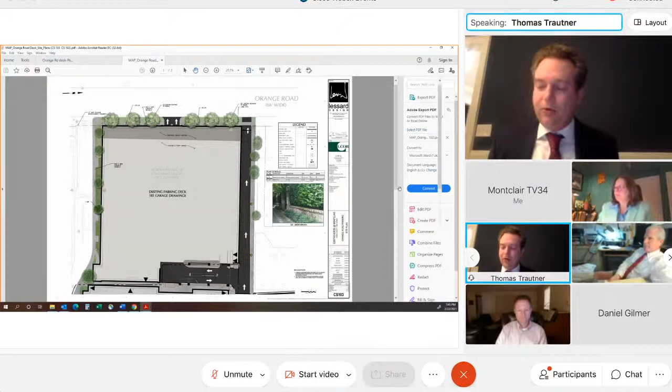Thank you, Janice. So with that being said, thank you Mr. Chairman and members of the board. Again, we're here for minor site plan approval to discuss the removal of a certain lift and slide automated parking system that was internal to this structure, the Orange Road deck, and to extend in place of that lift and slide automated parking system the floor plates, so to attempt to make up for some lost parking. When we were last here, the board had asked for a few items, and Janice, I just realized there's another one from what we just referred to. You had asked for an elevation of the facade that was previously approved, which we submitted, and perhaps Janice could allow for that to be shown. It just popped up on the screen.

Additionally, the board had asked for a parking management plan or parking plan to be submitted by our valet consultant, which we've also submitted. And finally, the board had asked if it would be possible to obtain a site plan which would clarify a certain encroachment of 8 inches into the right-of-way along the Orange Road frontage that was the subject of an approval that this board granted in 2017.

We thought that we would need to create that from scratch, but then in looking through our files, we discovered that there was an exhibit that was submitted. It's referenced in the 2017 resolution of approval as Exhibit A9 at that time. It's a colorized site plan which depicts the encroachments I just spoke about, kind of shows what I'll characterize as somewhat de minimis. There's 8 inches at one column, 7 inches at another column, and otherwise a few inches on a partial run of the south side of the facade along Orange Road. We'll speak about that exhibit in testimony this evening.

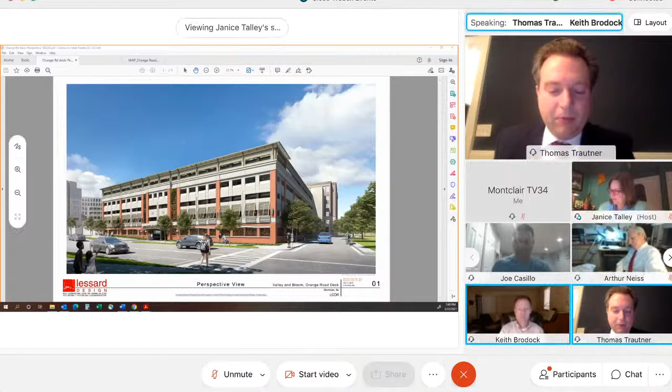Mr. Casillo, how long have you been employed by MAP, or I guess its affiliate LCOR? About 15 years. And your title is project executive. How long have you held that title? Going on 2 years now.

Now, what are the duties and responsibilities you have associated with your title at MAP? One of my duties is overall project coordination from inception to budgeting to implementation, construction, and completion, with obviously the owner's best interest at heart. Coordinating the project with all the design professionals, construction managers, local jurisdictions, reviewing of general contractor budgets and cost estimates and things of that nature.

And you're familiar with the subject of the application that MAP is presenting this evening? Yes. And you're familiar with the Orange Road deck and this project in general? Yes. And you oversee this project in accordance with your duties and responsibilities at MAP? Yes. And I believe you may have actually testified in 2017, at least in a limited capacity, regarding this project. Yes, I did.

So now, Mr. Casillo, you heard the testimony previously where I believe members of the board have been contemplating whether or not the 8-inch encroachment into the right-of-way that was granted by this board in 2017 should continue in light of the fact that the lift and slide is being removed. The question I'll ask is: if we don't move the facade back 8 inches, if that facade stays where it is, what is the approximate cost that MAP is incurring to basically build the facade that was approved in 2017?

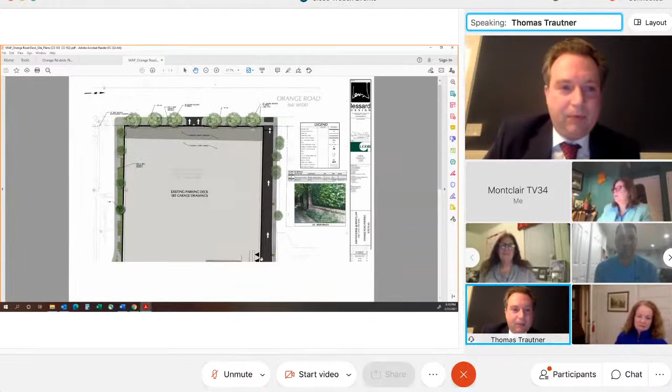There are two columns where there's about a 7 and 8 inch encroachment, and then there's a stretch on the south part of the building where the facade starts at 4 inches and goes down to, I think, 0 inches as you get near the columns in question. The short answer is, Joe, you can tell me if I'm correct, I think it would be rather elaborate to pull the whole building back, but the blunt answer is I don't think it would have any impact at all in terms of the parking that exists in the building. You don't gain any, and you don't lose any. The encroachments are related to the facade on the exterior.

Correct. Okay. And if this was to go ahead, maybe Janice Talley knows the answer. What would be the timing of the work, this very disruptive work, as Mr. Casillo mentioned, on Orange Road? What would be the timing with the building of the adjacent building where Ferrara's auto body was? A new building is going there. So what would be the timing of the work for each building?

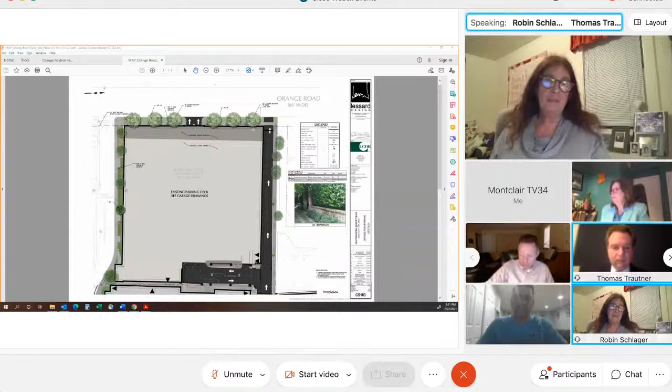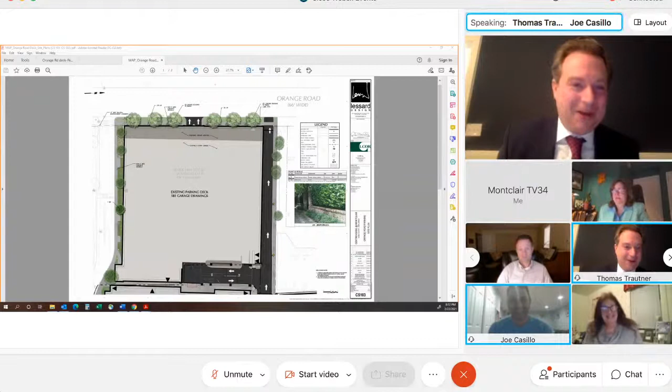Robin, I can't answer that because that's dependent on when the developer is ready to get started with the adjacent project. Joe, can you speak to, imagine that we were approved this evening, what would you anticipate would be a reasonable time frame? Bearing in mind a small period of time for resolution compliance and to continue and complete the work to build the building, the facade as was approved in 2017.

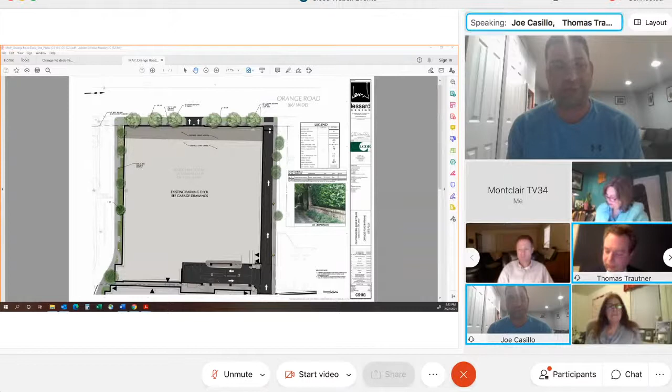So just so I'm clear, to continue the facade work as it stands today, is that what you're asking? Yes, correct, because some of it's already framed. I think the duration to complete it would probably be in the neighborhood of 2 to 3 months, only because some of the elements are weather dependent, primarily the stucco finish. You really can't do stucco in these temperatures, so you'd probably need to be somewhere in the middle of April before doing stucco. I would estimate we're in March already, so March, April, probably close to about 3 months.

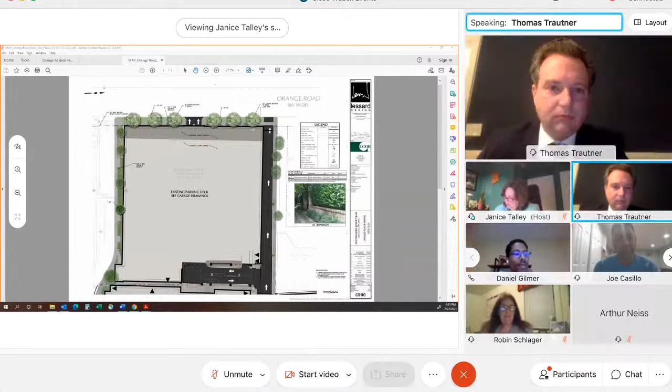Mr. Gilmer? Yes. Mr. Gilmer here, thank you for the testimony tonight. Also reviewing what we discussed last time, at the last meeting Mr. Berry noted that the lift and slide is not feasible, and I appreciate you mentioning the claims that are in that litigation, because that was actually a question I was going to raise as well.

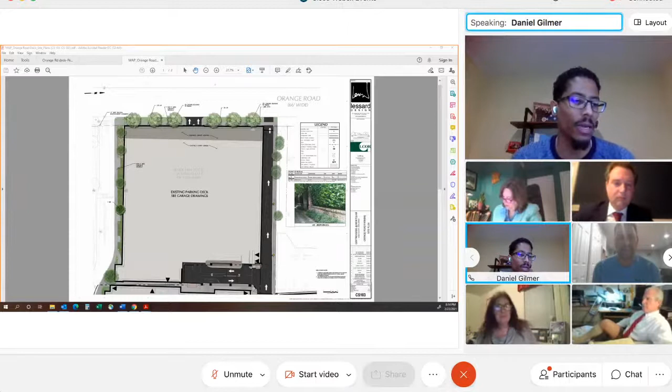And I know we discussed this a bit last time, so can you help me understand how this is not, it seems like a mistake that may have occurred? Mr. Trautner, what's the best way for us to understand as a board? Because even the questions asked tonight are kind of understanding the challenges with the lift and slide, but we can't get into some of the details of litigation, and there's concerns around costs raised tonight, which, similar to what Chair Nguyen mentioned at the last meeting, seems as though considerations of cost to a certain degree are out of scope for what we're considering tonight.

So if you could help me understand what led to the change in plans away from the lift and slide, and then also how cost is kind of in scope for what we're deciding tonight. Because what we already approved many years ago was a concession to a degree, a variance that was granted, and even what was in that resolution is not now being satisfied.

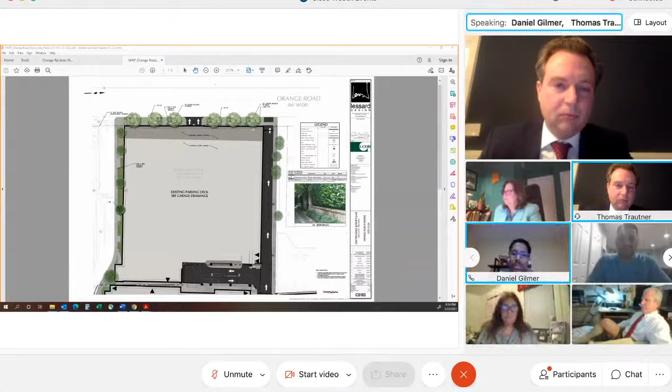So it's just a little difficult, I think, for some of us to now consider an additional variance when the previous resolution was not abided by, in part for reasons that it seems like we are not fully privy to even now.

Sure, I'll do my best to answer some of that. The short answer is we do not believe that if we were to attempt to complete the installation of the lift and slide automated parking system, that it would work.

We have additional concerns about it structurally. That's all the subject of the lawsuit. I apologize if it sounds like we're being cagey because we're not being exhaustively detailed about those allegations in the litigation. Part of the problem is it's the subject of ongoing litigation. There's something like this idea of qualified immunity - within the litigation you can say things, but outside of it, it gets a little more gray before people start getting upset about what you are or aren't saying about a defendant in a lawsuit.

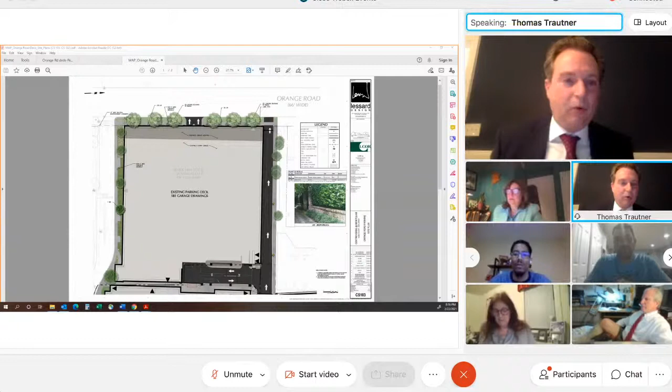So we're somewhat constrained about what we can talk about, except to say it is our belief and concern - and I'm going to make this sound rather extreme - let's say you were to completely deny this application and say MAP, we want you to install the lift and slide mechanism. Our concern is we would install it and it would never work, which is what led us to make the painful decision, and this is part of Mr. Casilla's testimony, that we would need to change direction.

Not install the lift and slide - the lift and slide again being internal in the building behind the facade - and instead extend the floor plates. We believe we could still achieve enough parking to satisfy the intent of the redevelopment plan to have adequate parking for the redevelopment projects. And it's going to cost us more money, specifically at least another $600,000 to do it this way, as opposed to if we could just install the lift and slide and be happy with it, and have everyone happy with it.

We think you won't be happy with us if it doesn't work. So what we're trying to avoid, in terms of bringing up the cost, is that rather than just spending another $600,000 or more to extend the floor plates, we're not also spending another $1 million to try and pull back the building 8 inches.

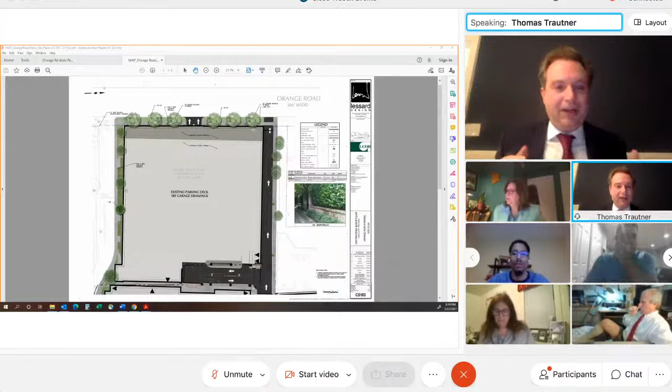What we're saying is we've spent a lot of money to put up a facade that was approved in 2017, and we don't want to have to tear it all down just to pull back a couple inches when doing so doesn't seem to serve any real necessity, planning or otherwise. And again, I'm starting to testify for the planner, and we should really wait till we get to his testimony, but it doesn't really seem to serve any purpose other than just saying, well, it's the principle of the thing. We think the law and the planning considerations should merit this board considering allowing us to continue with the facade as previously approved in 2017, where it is currently located, and that the 8 inches is really a de minimis issue.

Tom, if I might, I think Mr. Gilmer's question might be answered if you were to disclose whether or not you've had an expert review the lift and slide mechanism and opine that it would not be able to work. Or is this just an internal decision made by MAP that it's not going to work and therefore you're going to replace it out? I may be being presumptuous, Daniel, but I think that might go to answering your question.

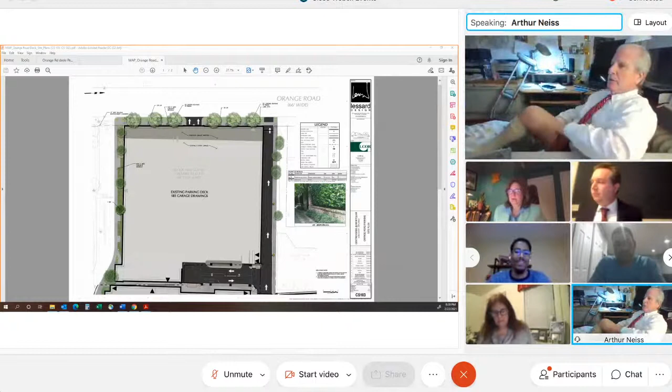Yeah, it would help in part, Mr. Trautner. Yes. I don't know if Mr. Casillo, can you, I mean, I have to imagine it's not like you or Brian Barry personally just one day woke up and thought this thing doesn't work. Can I assume, they may not have put a report out in the litigation yet, but I assume you've had professionals look at this independently and opine on this?

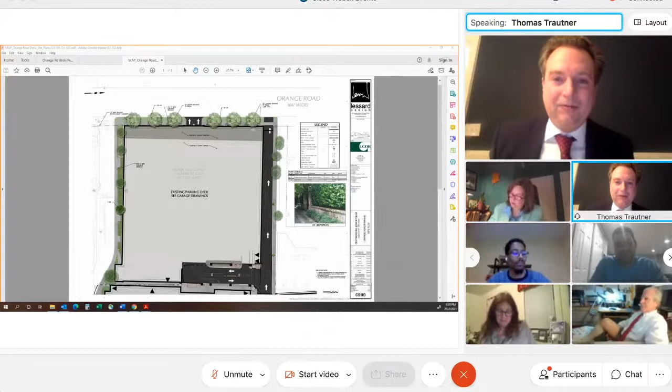I mean, I don't know if Brian, you want me to, again, I'm not sure. Or Mr. Barrett, if you can answer that question. I mean, I could shed some light. I'm not too sure how much I can say. At a high level, trying to take off what Mr. Neiss says, we have had 5 separate professionals in this field come out and take a look at this system, and all 5 have declined for a multitude of reasons to get involved with it.

And when you say get involved, you mean complete the system? Yes, take ownership of the design and complete the installation as it is. Again, for a multitude of reasons.

We also have a 6th expert coming from across the country. He was supposed to be here last week. Unfortunately, the weather delayed him. He is due out this Thursday for another opinion. So again, at a high level, we have taken the extra steps to investigate further. To Tom's point, we didn't just wake up one day and say, 'Oh, we're not using the system, forget about it.' We have taken...

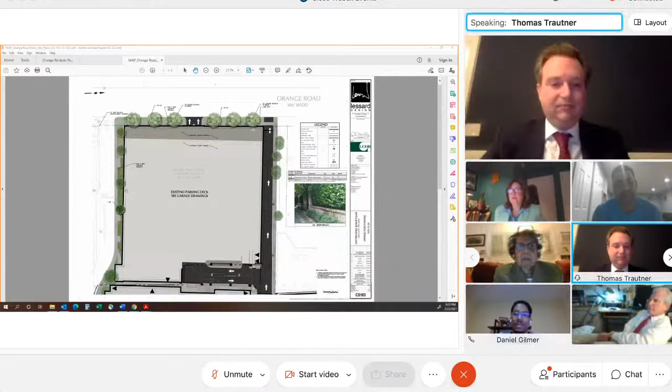And just to make sure we're clear on this point, the concerns that have been raised by these experts were not foreseeable when this application came to the board before? Correct. You're asking me that? Yes, correct. Are these people right, experts?

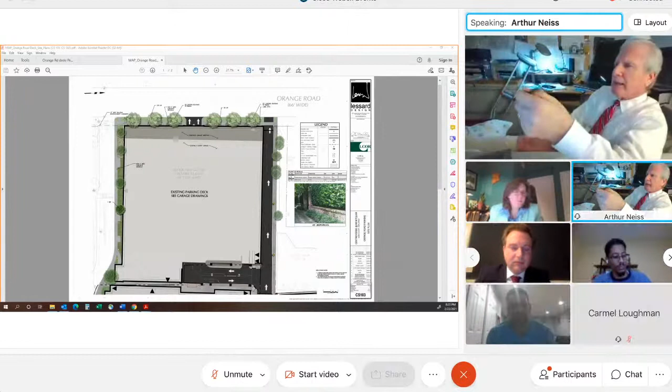Yeah, I'm sorry, Daniel. Are they experts or are they just contractors who are coming in to take up the construction or the creating of the lift and slide and decline to do so because of whatever reason, because of the proprietary nature of the lift and slide or whatever? Are they experts or are they just contractors who refuse to do it?

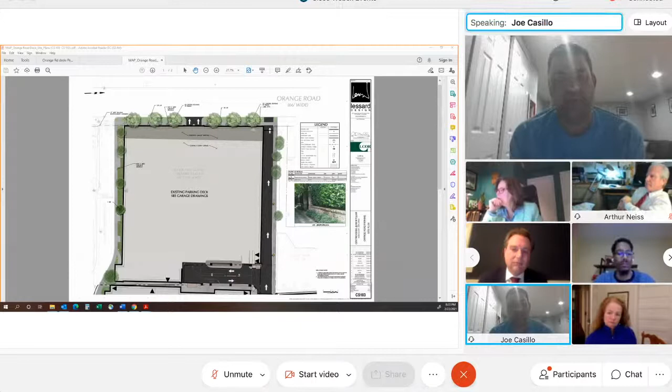No, they are, and Tom, if I may, they are experts in the field of automotive parking systems. All 5 of these outfits design, fabricate, and install their systems. So short answer, they wouldn't just be a miscellaneous steel contractor to come in and finish the work. They have design parameters as well. And engineering.

So basically, they told you, and forgive me, I'm not trying to be a hard nose about it, but basically they told you they wouldn't touch this lift and slide mechanism with a 10-foot pole. Yes, sir.

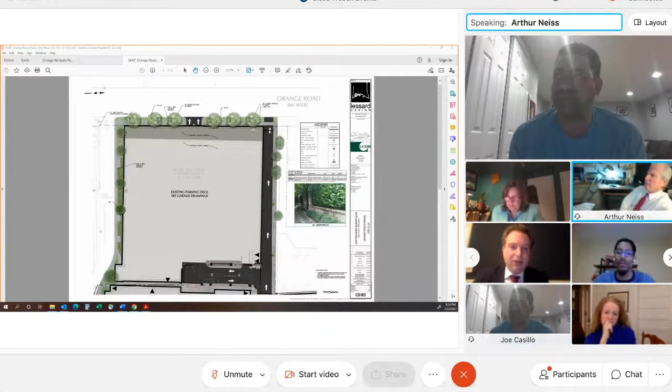Did they tell you why? I'm sorry, did they tell us, did they say why? Did they tell you why they wouldn't do it? Joe, I just don't want to get you in trouble. So yeah, I know, maybe at a high level answer. I mean, if you want to give the answer, because if this is true, if they said because we don't think it'll work, that's probably... I don't want you to struggle and start saying stuff that you shouldn't.

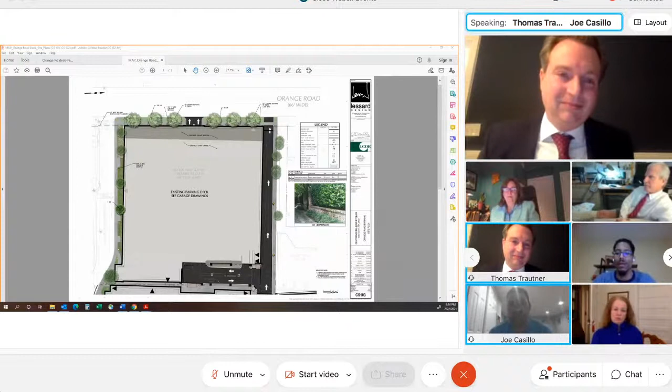Yeah, I mean, I guess for lack of a better term, they don't believe it'll work for, again, a multitude of reasons. They would not get involved. They would not warranty anything. Yeah, for a high level response, they just kind of scratched their heads and looked at us and said that this is not going to work, without getting too far into the detail of why.

Daniel, I apologize for preempting you. No, that's fine, actually helpful.

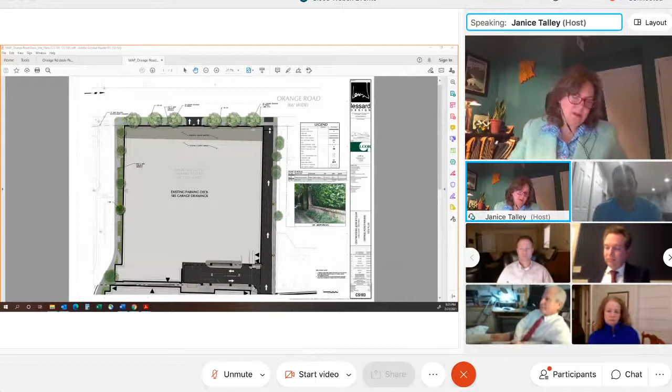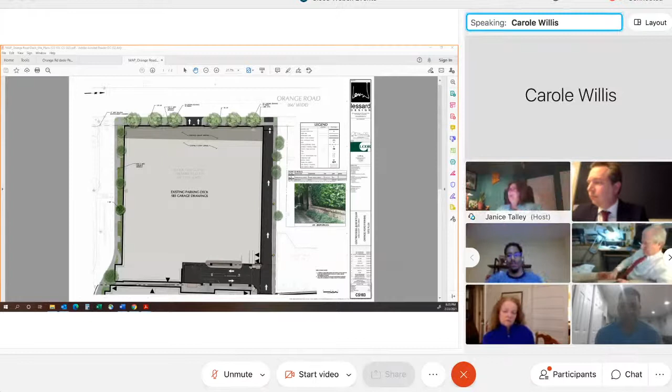Carole, I don't think you have your audio turned on, so if you want to ask any questions, you need to turn on the audio on your computer. I did turn it on. Can you hear me? Oh, now I can hear you. Good.

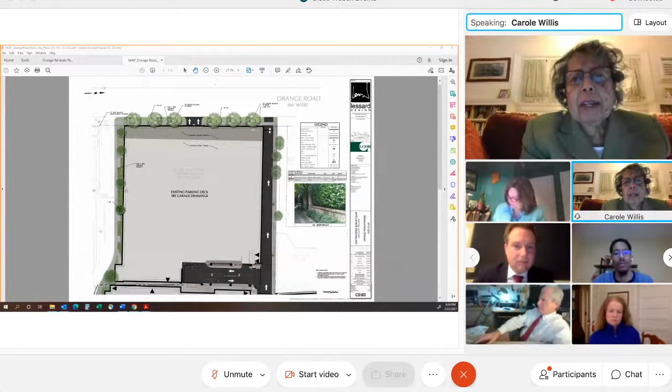I had a question at one point. At the last meeting, when I asked, was this problem with the lift and slide one that was going to cost us parking spaces? I believe I was told the answer was that it would be about 3 per level. So now I hear today that there is no change in that. Was I wondering, did I miss something, or can you clarify what the impact is on the number of parking spaces?

My understanding, and Joe you could probably confirm this, is there's no impact on the parking spaces. Ms. Willis, unfortunately, when we were here at the last meeting, we were operating under a mistaken assumption that more of the front of the building was within the 8-inch encroachment than actually is.

When we found the exhibit, which we've now produced, there's a page on the screen labeled CS103. There are certain insets drawn on this document which reveal the manner in which the encroachment occurs. Inset A shows a 4-inch encroachment into the right-of-way at the southern end of the building along Orange Road. Inset B shows a certain column encroaching 8 inches into the right-of-way. Inset C shows a column encroaching 7 inches into the right-of-way. Inset D reveals that by the time you get to the northern edge of the building, or actually much before that, probably starting at inset C and all the way across to inset D, the building is actually behind the encroachment line. In other words, there's no right-of-way encroachment there.

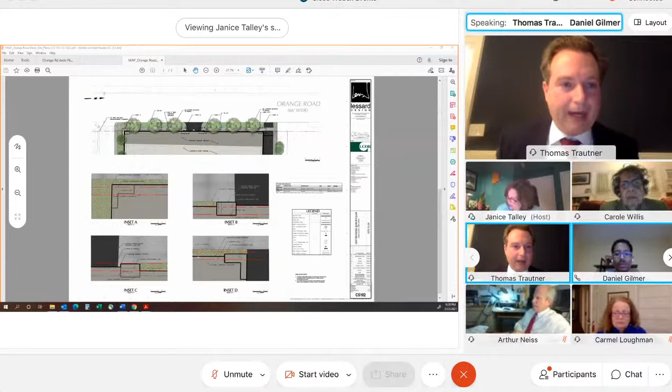The short answer is these encroachments are rather de minimis. Because they're de minimis, if the facade of the building was required to be pulled back, it wouldn't affect parking one way or the other. We wouldn't gain any parking spaces, but we also wouldn't lose any. The encroachments really relate to the facade elements of the building. It's not that enough of the building is sticking out that it would cause a loss in parking, or conversely a gain in parking if you let us keep it.

Thank you, I have another question. Yes, I'm sorry, Daniel. Were you done, Daniel? I was not earlier, but fine to go ahead, and then I can come back to mine.

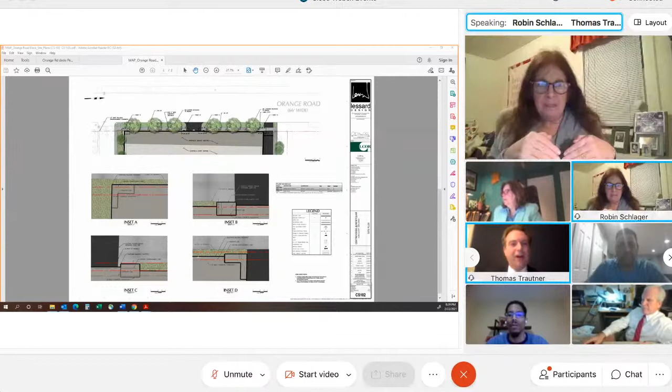So if you could explain to me, LCOR and MAP bought the parking deck from another entity recently? Well, it wasn't recent, but it was actually acquired from the township, and the township previously acquired it from DCH Auto. So the town built the parking deck? I believe DCH Auto built the parking deck. It was originally built to store their auto inventory.

So when LCOR and MAP bought the building, did they not have an inspector go through it and find out that the parking mechanisms, that the lift and slide, wasn't working? It's like when you buy a house, you have an inspector, so you don't buy a house and find out the elevator doesn't work. Sure, no, it wasn't there, ma'am. It wasn't there at the time. When we purchased the property in 2012, I think it was, the lift slide didn't exist.

Councilmember, so just by way of quick background, this deck was owned by DCH, then it was acquired by the township, and then in conjunction with the development of the Montclair Center Gateway Phase 1 redevelopment plan, MAP got involved. MAP obtained site plan approval after being designated redeveloper of the Valley and Bloom redevelopment plan at that time in 2012. That approval also approved the conversion of that DCH parking deck, which was not really a public parking deck, but really just a building designed to house auto inventory, to become a public parking deck to serve the redevelopment area.

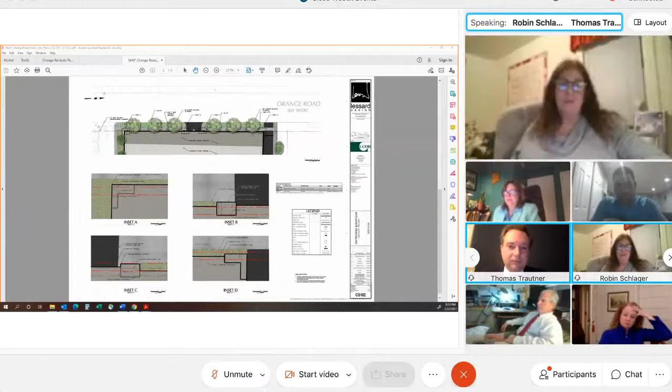Yes. So as Chairman mentioned, the lift and slide was part of this, previous variances even being approved, but holding that in place for the time being, Art or Janice, I had a quick question.

So given that we have the township having granted the encroachment easement back in 2013, but then we also have the additional 8 inches in 2017, were we not to approve this application as it stands tonight, the latest version of it, what occurs with that 8-inch easement or encroachment easement from 2017? I'm just trying to understand how this plays out, where that lands on the other end, were we not to approve what's before us now.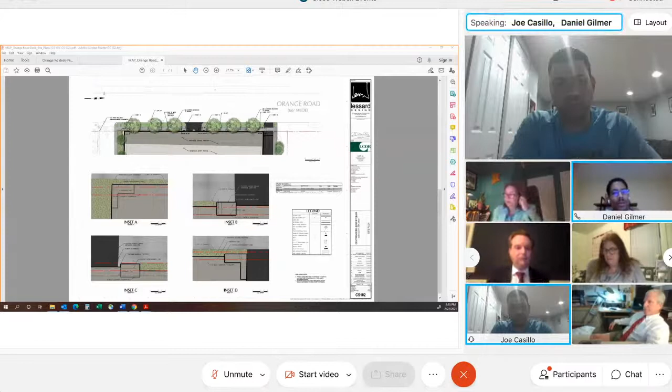Well, I would think that land would revert back to the township, and they wouldn't have the right to have the building on that 8 inches, or at least recommending to the council it was conditional. I don't know, without reading the actual easement and understanding its terms, and I've never seen it, I wouldn't want to opine about that or answer your question, Daniel. Even to know that it's not a very clear, direct answer that we know tonight is helpful.

Yeah, if this helps, I agree there's some complexity to this issue, and I understand why you're asking the question you're asking. The application before the board is actually just a minor site plan approval to extend the floor plates with the elimination of the lift and slide inside the building. There's actually no deviations or variances requested or required in conjunction with this application. It's been suggested, and I suppose one could frame it as the variance that was granted in 2017 might be rescinded by the planning board as a result of the elimination of the lift and slide.

Obviously we don't want you to do that, and we might even argue, with the risk of being adversarial, that you can't do that, but I don't want to go down that path because I'm hoping I can convince you that it's not necessary. But I think that's some of the complexity we're dealing with here, because technically speaking, you don't need to approve another variance to let us build the facade, because we're not actually changing the facade as part of this application.

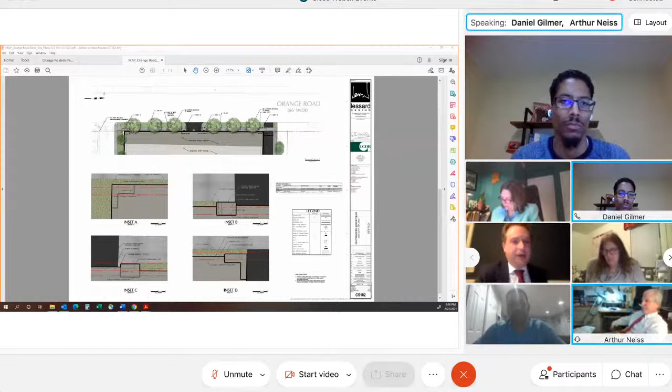Yeah, there's an easement that was granted by the Township Council in 2013. We are required to enter into another easement with the Township for the additional 8 inches, and that hasn't occurred yet, so there is no document on that. Could you forward me the 2013 easement, please? That I can do.

Maybe it's just not drafted up like this at all, but I was wondering what role the lift and slide played in that 2013 easement, and whether it was a condition included, or how this is even drafted up. I have good news on that — our planner is actually going to speak to that this evening.

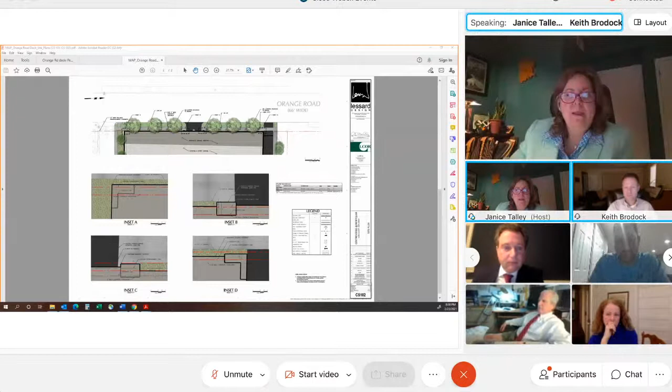Other questions from the board? Hearing none, Ms. Talley, I believe there's one member of the public on. Are there any questions for Mr. Casillo regarding his testimony tonight from the public? The call-in, I have unmuted you, whoever's called into this meeting — if you have any questions, this is the time to ask. All right, I don't hear any questions.

I don't either, I have a question — this is Steve Rooney. The lift and slide system was going to add another 64 parking spaces, am I right? So it was, yeah, the lift and slide system was 116 spaces, but functionally we had an exhibit A11 that spoke to this last time.

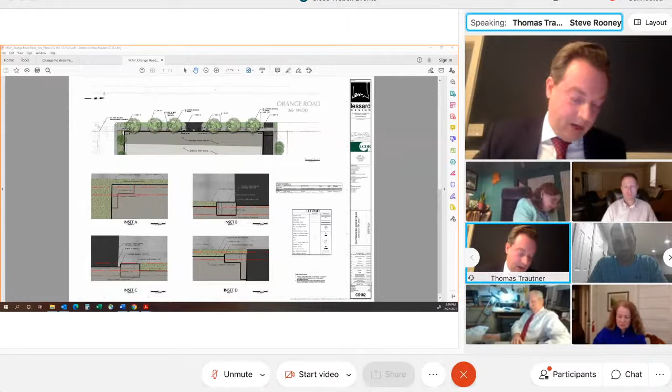Basically, the change you're dealing with is: if the lift and slide was to be installed tomorrow, there would be 614 spaces in the garage, functionally speaking, and the 5th floor is valeted in that scenario because it's always valeted for the hotel. But with the elimination of the lift and slide and the expansion of the floor plates, there's 550 spaces in the garage, again with the 5th floor operated as valet. So to answer your question bluntly, the loss of the lift and slide is going to result in a loss of 64 parking spaces. Yeah, that's what I thought.

And if we're going to continue to have it built, we're still losing parking. So...

That is correct, and as Ms. Bryoff testified last time in terms of what we think is the demand — obviously you've heard from your own consultant, Mr. Giosa, and our next witness, Mr. Sokich, would speak to how we could deal with potential special events at the hotel if demand for those events in the future is more than what we saw while the hotel was operating pre-COVID.

Right, but we're still losing 64 parking spaces. Yeah, that's the blunt answer is yes, and the advocacy answer would be, but with 550 — generally speaking, the garage was seeing pre-COVID demand ranging between 270 and 315 cars, with a one-time peak demand of 438 cars. So we think we'll be okay, but I'll let the experts speak to that.

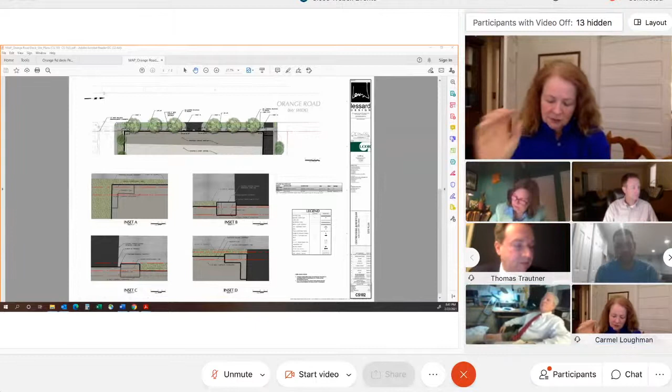So just, Tom, just so I'm perfectly clear — there's 550 spaces if you extend the parking plates, right? That's correct, yes. All right, thanks.

So I guess to try and answer that question, we look at this in two different ways. One, we acknowledge there's an obligation under the redevelopment agreement and the redevelopment plan to provide parking for the redevelopment projects in the area, and we want to make sure we can answer the board's questions to ensure there's adequate parking for what's projected as necessary. I believe the redevelopment agreement contemplated at one point approximately 557 spaces — hold on, let me get the right number — about 557 spaces, so we have 550.

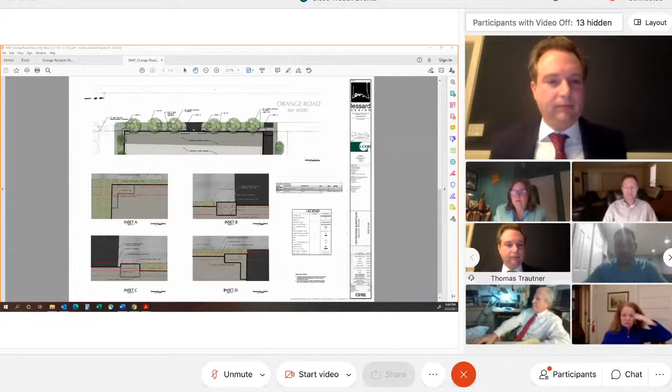Ms. Willis, do you have a follow-up question? I think you're on mute. Okay, then am I back on? Yes, you are. Thank you.

My question is, though, that the board in its negotiations with granting the variances were based on the fact that there was a promise of so many parking spaces, and that was what attracted the idea of doing that. Now, I know there is always a shortage of parking, and if you cannot provide the parking through that agreed upon way, and you're saving by not doing the lift and slide, or at least not saving what you had planned to spend, but what you would have to spend - what agreement can you give to the board that will provide the 64 spaces that we need? Now you're saying, well, you don't need them anyway, but I think in the long run that's never proven to work out right, that the board doesn't need more parking.

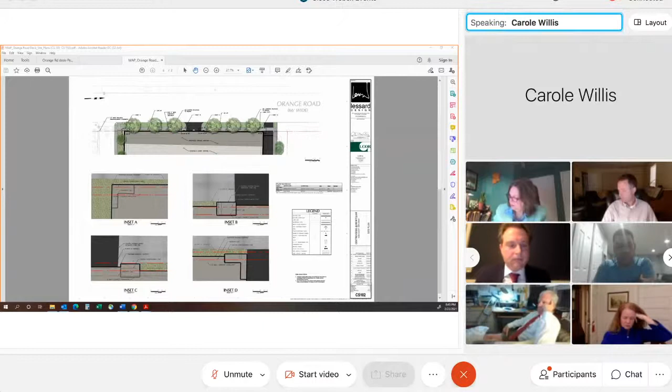No, I think I understand the question you're asking. And again, I'll let the planner speak to this when it's his time to testify. I don't know that we would agree that the 8-inch encroachment into the right of way was strictly speaking linked to getting a full 116 spaces in a lift and slide mechanism, but I won't quibble that obviously the resolution speaks for itself, that there was some consideration of the existence of the lift and slide, perhaps as part of the board's justification for granting the extension into the right of way. I guess it's probably premature for me to talk too much to the second part of your question, except to say...

While I know there's a belief in Montclair that there's always a need for more parking, and I think in parts of town that is true, historically we haven't seen that with this deck. We're seeing an average parking rate pre-COVID of 270 cars in what would be a 550 car deck. 15% of the time when it's busy means 315 cars. And one time, I think it was a special event at the hotel, there was a peak demand of 438 cars in the garage. Again, we have a capacity of 550 spaces. All that being said, I understand your questions may be well directed to our next witness, and you may still have concerns, and we can try and address them at that time.

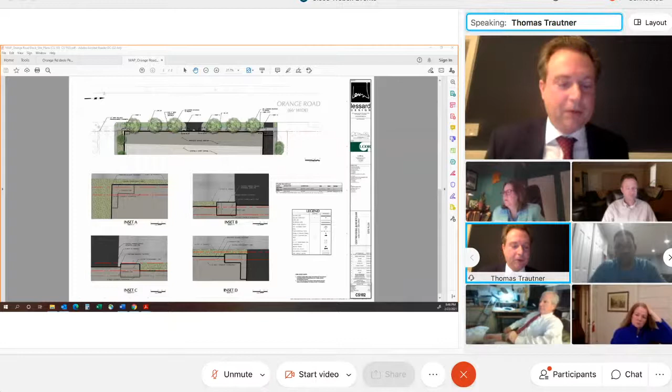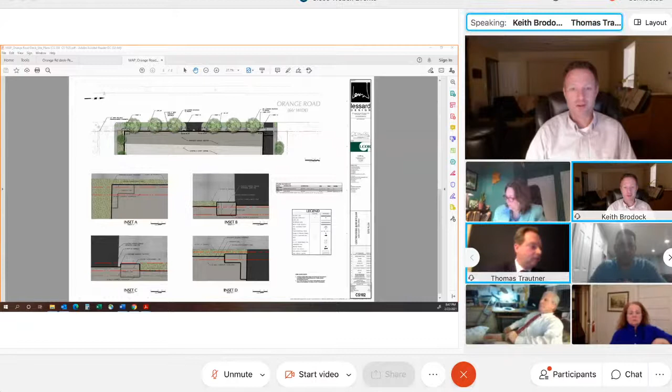Just for the record, those numbers, Mr. Trautner, I don't agree with them. I think I brought that up with Ms. Bryhoff's testimony a little bit, and I'll explore it a bit more with Mr. Sokich's upcoming testimony. But I think those numbers are a little flawed and didn't have some valuable information included. I'm not quite sure why, but hopefully we'll get to that.

Understood. Anything else from the board for Mr. Casillo? Okay, Mr. Trautner. Sure. So, Mr. Sokich, maybe we can have him sworn in, and then I'll seek to qualify him as an expert in parking management.

Mr. Sokich, can you hear me, sir? I can. I'm sorry, I can. Can you hear me? I can. You're not on video, correct? I just hit the video button. Let me hit it again. Start my video. Hear me now? There you are. Yeah, I can see and hear you. I can see you now, sir.

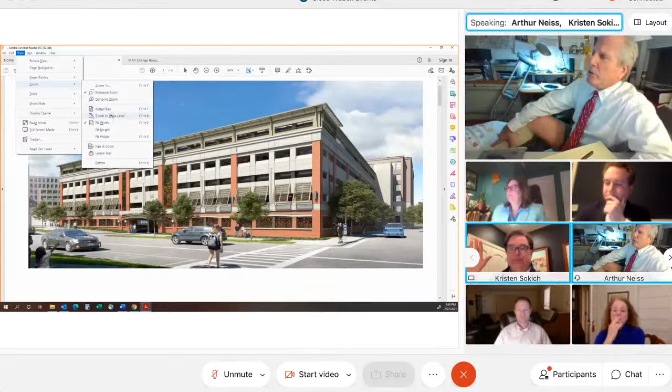Would you raise your right hand, please? Do you solemnly swear that the testimony you're about to give will be the truth, the whole truth, and nothing but the truth? I do. Would you please state your full name and business affiliation for the record? Sure. My full name is Kristen Sokich. My company is Pro Park Mobility. I'm the Executive Vice President.

Now, Mr. Sokich, can you just briefly give the board the benefit of your professional background? I think the board will recognize you in terms of what you do, having been qualified by the board previously as an expert in parking management.

Sure. I've been in the parking management business for over 25 years. I've operated over 500 parking facilities, everything from universities, hospitals, municipal garages, residential garages, commercial garages, commuter locations, valet operations, event parking, and I've also been involved in transportation. My local experience in Montclair includes operating Montclair State University for a number of years. Currently, I'm operating Mountainside Hospital. I previously operated the Crescent Street deck for about a decade, the parking garage by the train station in Montclair, and I've been operating the Valley and Bloom deck since it opened, in addition to doing some management work for Bloomfield's municipality.

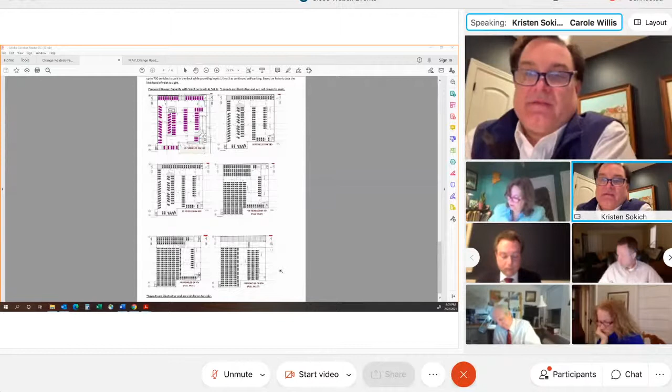Yeah, sure, so a few things there. The 700 car capacity is really based on just valeting the 3 upper floors of the deck. If capacity was a concern, we could always expand valet to the 3rd floor, the 2nd floor, and down to the 1st floor and get a lot more cars than 700. In terms of the columns, there's no columns on the roof, and that would be our main valet pickup and drop-off area to begin with.

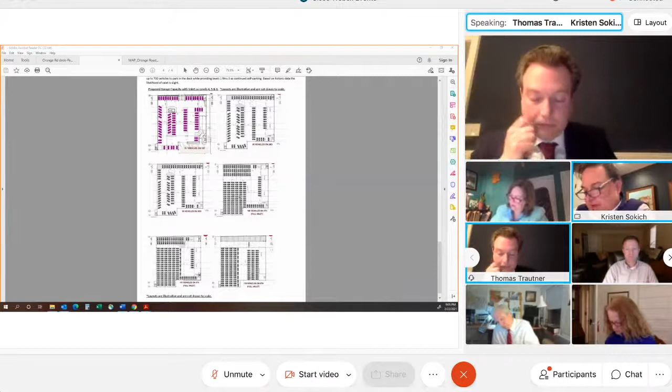If needed, we would go down to the 4th floor. There are columns on the 4th floor, but from a parking perspective they're very narrow, 14 inches wide. If you go into most garages, you'll find columns usually 2 to 3 feet wide. The illustrations provided in the parking plan were just that, illustrations. We would make some field adjustments - if we had to move one of the rows over a foot or two to accommodate a column, or leave one space empty because a column was in the way, we would do that. But from my experience, there's plenty of room for us to make field adjustments to compensate for any column issues we may experience on the 4th floor.

And then the other thing I'd like to bring up is, in the valet plan, I've got cars parked 4 deep, 5 deep, 3 deep. This is typical - if you park anywhere there's valet, they're parking cars deep. This deck used to be a car dealership deck; they used to park cars 9 and 10 deep. I don't know if anybody commutes from Hoboken, but there's a big parking lot right outside the PATH station there that I actually operated at one time. We parked cars 9 deep in that deck, with waves of people coming in and out once they're coming in and off of trains. So what I proposed is not out of the ordinary for a valet parking operation.

Mr. Sokich, I just want to ask you about the cars being potentially parked 6 deep in configuration. I know Mr. Joseph expressed a concern about retrieval times in a timely fashion. Can you speak to that in your operational experience? If cars were parked 6 deep, what's your feeling on whether this is a practical way of operating?

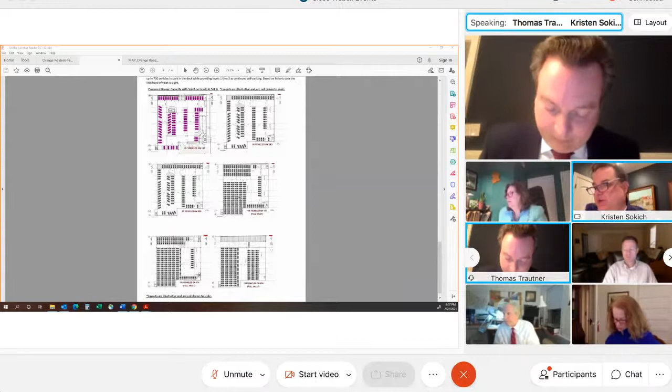So some of it I mentioned earlier in my testimony. We try to mitigate wait times by asking people when they think they're going to return. We use technology, text for your car. We also enable people to pay for their parking prior to even getting to the deck, so they can pay right on their mobile phone and not have to wait while their parking gets processed. That's what we can do, and that's what we can control.

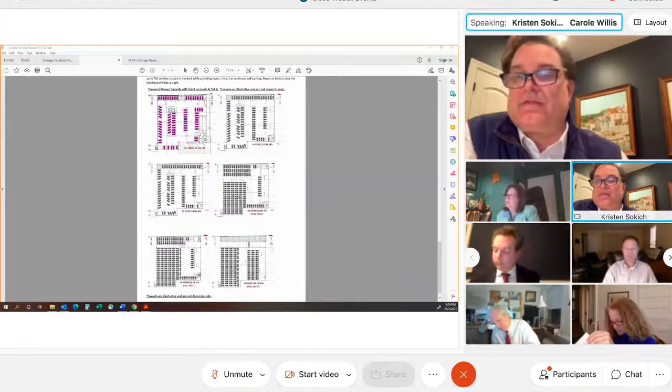Is there going to be somebody who just shows up out of the blue, or maybe they said they'd be 4 hours and had to rush home for some reason? Yeah, that happens all the time. But based on the staffing levels we have, if I've got 135 cars up on the 6th floor, I'm going to have 7 people up there. Even if I have to move 3 cars to get one out, we should be fine. There shouldn't be anybody waiting any extra length of time in this scenario. We're talking 135 cars up there, down to floor 4 you've got a little bit more, I think it's 146. But with the amount of valet hours we're going to have, and the fact that it's a managed situation with these other measures to remedy wait times, it should work pretty well.

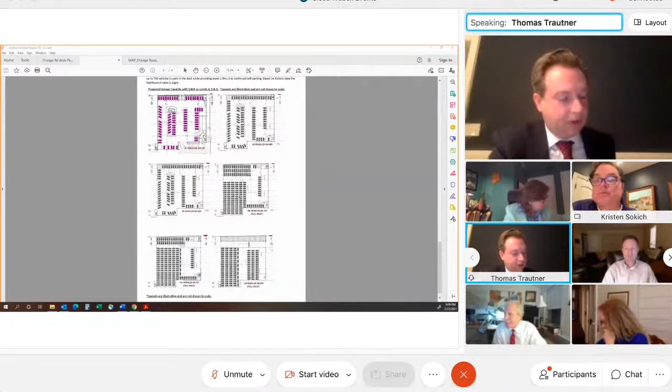It may be a similar answer to some of the things you've already said, but Mr. Jost also raised concerns about stairs and elevator towers potentially being blocked by rows of parked cars, and also where the valet pickup area is. Where does somebody go to hand their ticket to the valet stand, and how do they get there?

When I had these illustrations done, they were basically just to show capacity. The waiting areas are going to be by the elevator vestibules. That's where the public will exit, and that's also where they're going to come up to pick up their cars. On the 6th floor, we showed cars parked in front of the elevators, but we would open up a 4-foot walkway to allow pedestrians to get from the elevator to the main drive aisle where they'd pick up their vehicle, simply by shifting some cars over or parking them a little differently to free up that walkway.

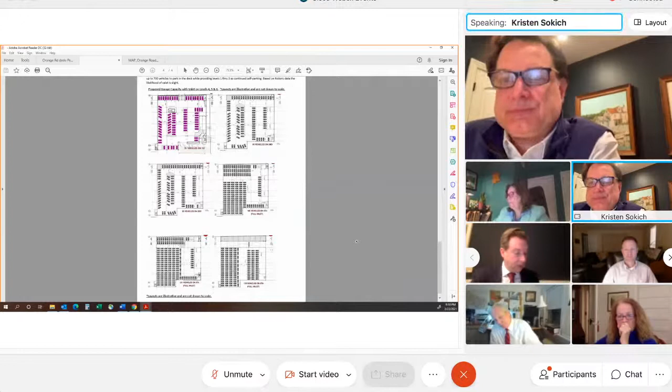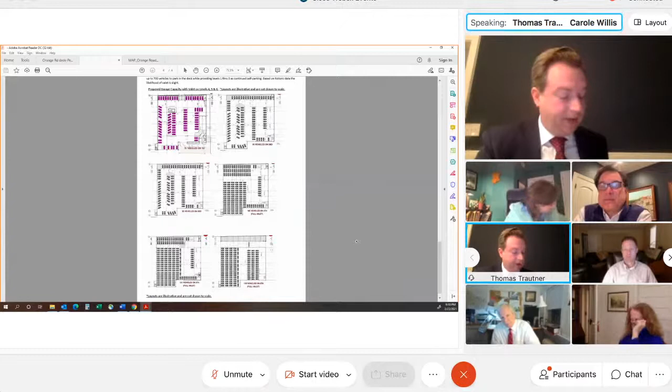Mr. Sokich, there was a request for a question about whether the applicant can confirm they're not going to close or refuse access to the parking garage unless it's operating in what Mr. Joseph was calling valet step 6, or a full valet on every floor of the garage. Can you confirm there's no anticipation of ever closing this garage, since the suggestion is floors 1 through 3 are always going to remain in a self-park configuration?

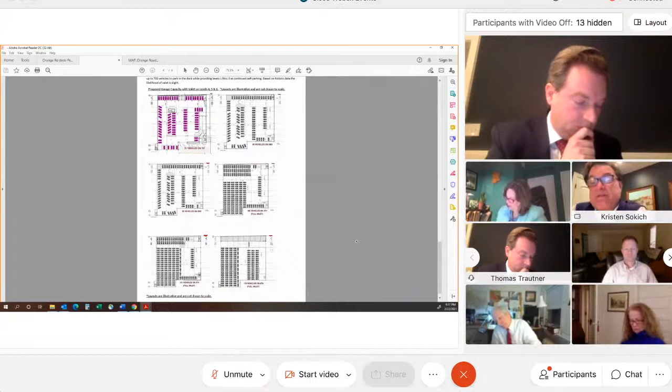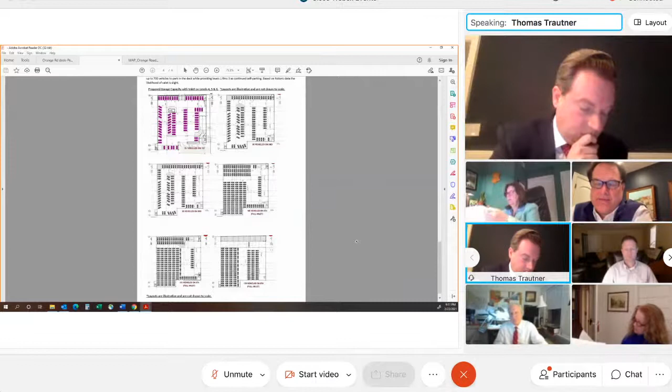Let me address that a little deeper, since I know it's come up in other planning board meetings. We have never closed this garage for capacity issues. We've never closed this garage completely. There's been a handful of times, probably less than 6, where temporarily transients were prevented from coming into the deck. One time that lasted for 3 hours; the rest were no more than an hour, maybe an hour and a half. And the reason that handful of times took place had nothing to do with capacity.

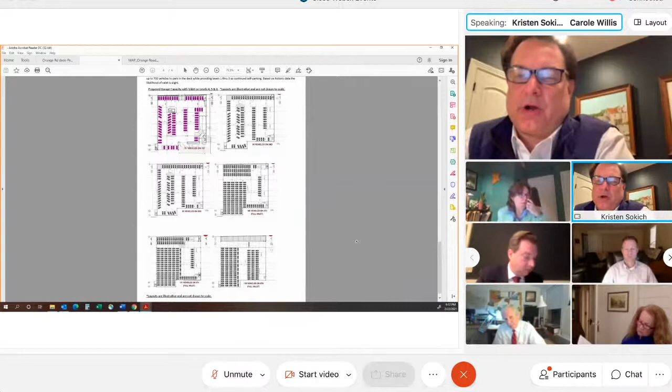It had everything to do with what was going on in the garage on a construction basis. There were times when new lighting was installed, new membrane was being laid on each floor, work was being done on a given ramp, and the construction of the lift and slide necessitated moving materials around. During all these years, we've always worked hand in hand with the lift and slide people, with Joe Casillo's people, but at the end of the day, because of safety measures, we had to make a decision to close it off temporarily to accommodate the construction taking place in the deck.

I just want to make it clear that it was not because of occupancy. It would be no different than somebody driving down a street where they're doing construction, and the construction people are doing the best they can to keep the street open 95% of the time. But occasionally they've got to stop traffic 100% because a machine is going to take up the whole roadway. So it's not really too different in this parking deck.

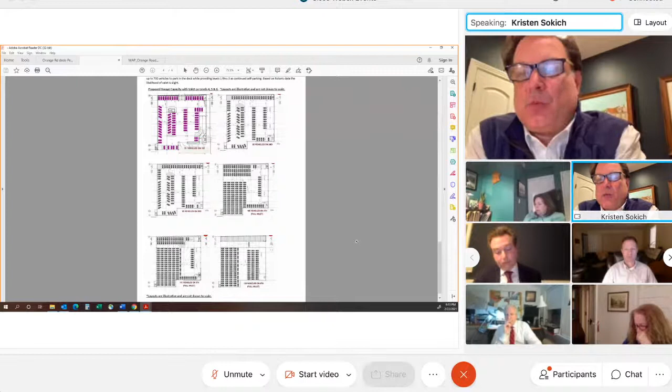Those few times when we did have to close it off was really for safety reasons, or an issue where something was supposed to be finished by a certain time but then bled into the evening rush hour. We were also handicapped by not having the Orange Road egress open. This deck is supposed to have 5 lanes, 2 entrances and 3 exits, but we've been operating with 3 lanes for a good part of that time. So because of traffic flow and construction issues, there were times we had to turn it off—no more than an hour and a half on average, and really not more than half a dozen times.

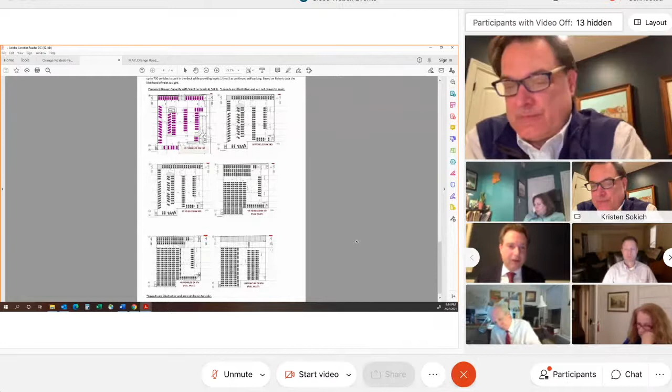Short answer, we don't anticipate closing it, particularly once the deck is finished. I honestly feel that we'll never close the deck. I mean, if there was no redevelopment plan and they just opened this garage the way it was with 498 spots and never invested a penny into it, you'd be fine.

So now two last questions, Mr. Sokich, before I'll ask you to sum up. There was a concern expressed by Mr. Giosa regarding drivers who may have retrieved their cars, or people coming in to park. They're on the 1st, 2nd and 3rd level, and then you have valet operations taking place, valet retrievals, and traffic potentially mixing. Can you speak to how safety will be ensured on the 6th and the 4th floor?

Sure, I'll speak to the whole deck to start with. I don't think we've ever had a damage claim in the garage based on an accident. We've had some claims where people said there was a line leak on their car, or they parked it and somebody hit their car while it was parked. But we've never had an accident on any of those ramps with cars colliding into each other, or anything even close to that.

And then the other thing is, that one in a hundred chance that we have to valet, it's going to be controlled. We're not just parking the cars, we're controlling the traffic flow from 6 to 5, from 5 to 4. The other levels will be operating as usual, so there'll be no need on those levels. But we'll be controlling access to the ramps, who goes up, who goes down, to minimize any issues with traffic during the times of these events.

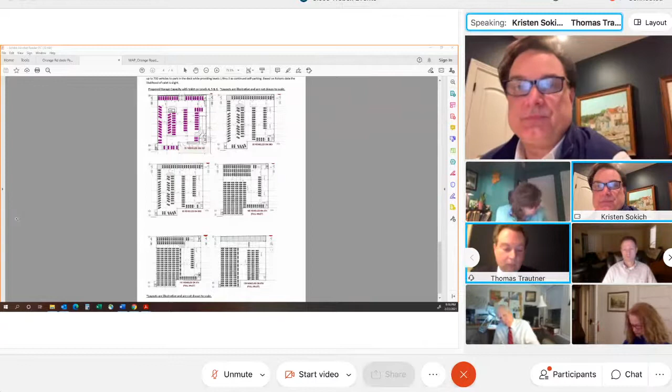And a question was raised at the prior meeting about the 48 Board of Education spaces remaining self-park. Is that what's envisioned even if the deck went into this hybrid valet capacity? That's absolutely correct—nothing would change for the Board of Ed. They would continue to have the same access as they do today to the 2nd and 3rd floor to park where they wish.

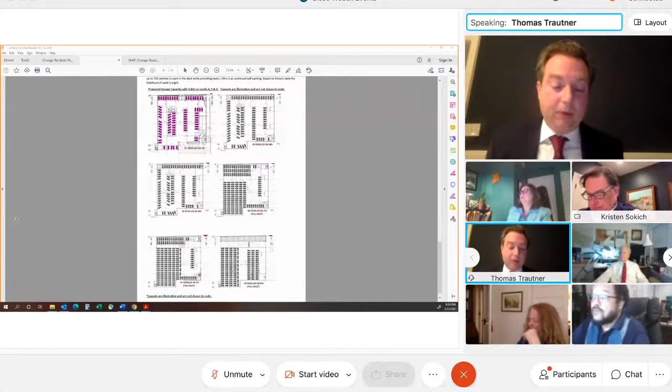Okay, so Mr. Sokich, to sum up, based on all the testimony you just provided, in your opinion, does the parking management plan you presented allow the maximum parking demand, which Ms. Freihoff and others, Mr. Giosa and others have projected, to be accommodated in this deck?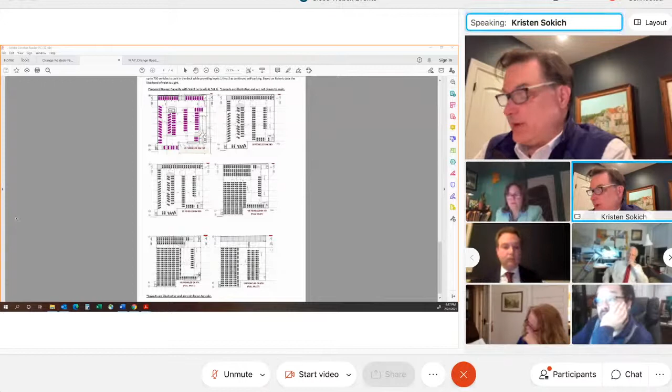Yes, I believe the plan will work, and I don't foresee any issues with capacity. It'll be a managed situation at times when needed, but as has been the case, we're able to accommodate all the user groups, and I don't think that'll change. I mean, we've already been doing it.

And in your opinion, will implementing this parking management plan allow the deck to operate safely and efficiently from a circulation and parking standpoint? Yes, it'll actually operate better because we'll have access to the exit on Orange Road, and we won't have any lift and slide operation happen on the ground floor. So if anything, it's going to improve the traffic flow within the deck.

Mr. Chairman, I don't have any further questions, but I have a suspicion that members of the board and the public may. So I would imagine so, and maybe I'll start with a couple of questions.

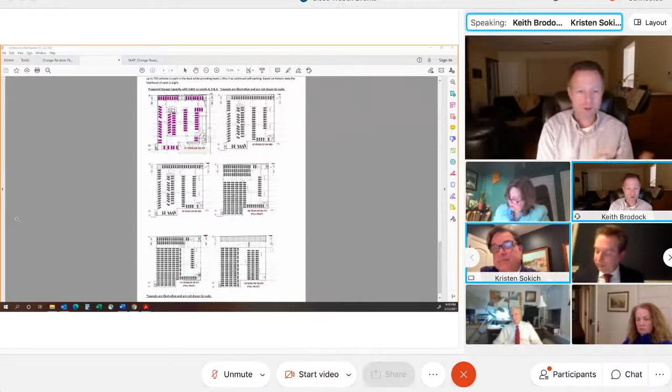Mr. Sokich, you mentioned closing the lot for certain reasons at times. Can you give me an idea of just when, you know, 2016, 2018? Do you recall when those events were? Say 2018, 2019, early 2019.

And did you testify in another matter before the board that those sandwich boards were put up that said lot full because you were reserving parking for the regular users of the lot? That, I don't think that was my testimony, no.

It wasn't your testimony regarding this particular parking deck, that we put up sandwich board signs that said capacity full? I think it said lot full, that's what the member of the public had mentioned, and you said. Yeah, I don't think I testified to that, but there may have been sandwich board signs that said something like that. But that's not indicative of what was actually taking place.

I mean, that's a typical sign you'd probably find at most garages, a garage full sign that they roll out. In this case, when we closed, it wasn't because we were full. Like I had testified, it was because of construction, safety concerns, and stuff of that nature.

Well, what I thought you had testified to before at the previous hearing was that it was to reserve, let's see what I have here, it was to reserve enough parking spaces for the regular users of the lot.

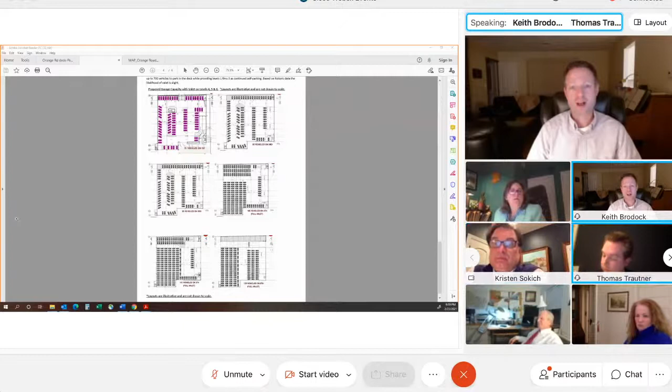And that's what I'm trying to get at, is how, if there's a capacity issue. Not that I'm saying I don't think that was my testimony. I don't know if you have it, you can read it back, but I don't recall ever testifying to that.

There was a member of the public that was asking about it, and I think over the course of a couple different evenings there was discussion. I recall somebody from the public saying that the garage was full, they couldn't get their car in, but I don't recall giving them that answer.

Could you speak up to that? Sure, yes. There may have been members of the public, but I was one of the people who raised it as a board member. I personally had seen signs that said it was being reserved for the contract customers. I asked that question, and I don't know if it was you who testified or exactly which member testified, but I do recall the answer was.

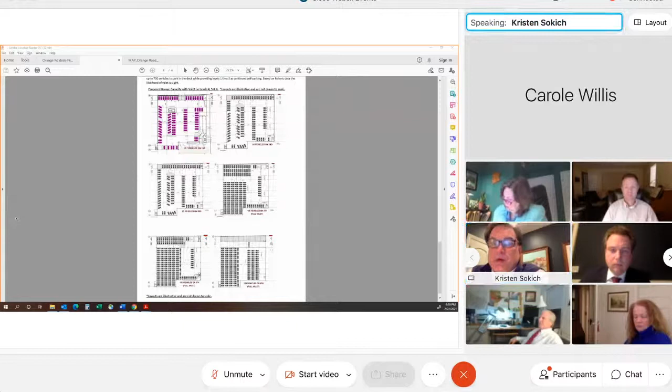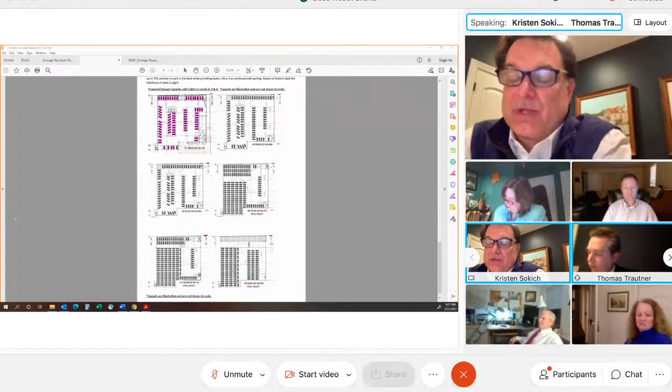So to your point, because the monthly people are folks that live there or work there, we shut it down those few times to make sure that they had space. But then as soon as we realized or knew that there wasn't going to be an issue because of whatever was taking place, construction or obstructions or whatever it may be, we opened it back up. And like I said earlier, in most cases it was only for like an hour and a half. I think there was only one time where we actually had it closed to transients for about 3 hours.

I guess, go ahead, Mr. Trautner. I was just saying, yeah, Mr. Sokich, I just want to clarify, so frankly, so I understand, I think what you might have just said is.

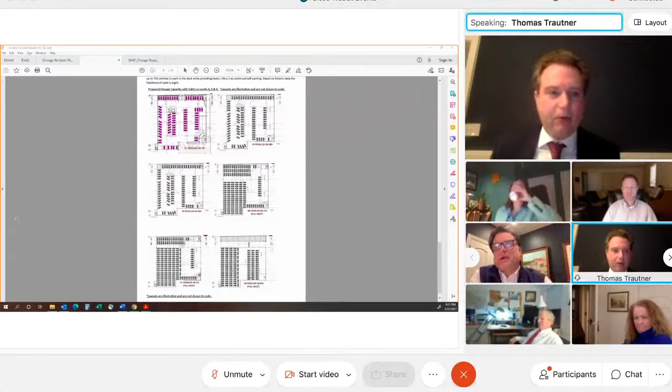Because of construction, which I'm guessing had a floor or two closed at one point in time, maybe for an hour or two or longer, there were signs that were put up to close the deck, and in part there was some concern that you were trying to hold some spaces for monthly parkers, because of the concern that so many other spaces were out of commission due to construction. I don't know if I'm putting words in your mouth, but is that accurate?

Well, there was a time, I think it was over like a 6-week period, where they were putting down new membrane from the top of the deck to the lowest level, and we would lose a floor for like a week at a time.

During that time, things got done in phases. We tried to keep the ramps open. They would tell us we could get this space back, and then they would take over some other space. It was a fluid situation, and there were times where the garage got closed to transients for a few hours. It would seem that would be a time for using valet parking, but that wasn't the option chosen.

If we could have planned for it, we would have done valet parking. We don't control what takes place with the construction people. We only control who's coming in, who's going out, and where they could park. Even when you have the best plans, sometimes things go sideways.

We were dealing with lift and slide construction, membrane and lighting installations, widening of ramps, drainage replacement. This deck has had ongoing renovations since the day we opened. There's been a lot taking place in there. And to be frank, the fact that it's only been maybe half a dozen times where we've had these disruptions really bodes well.

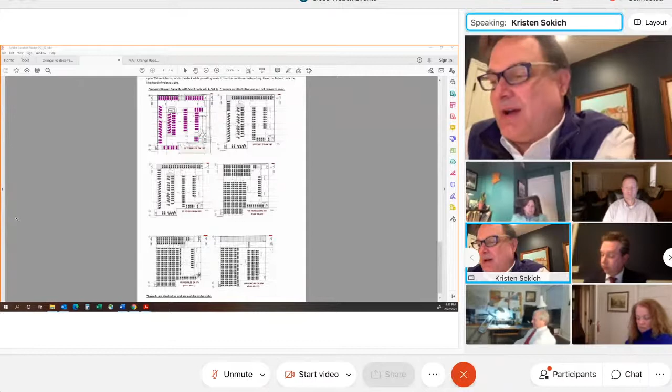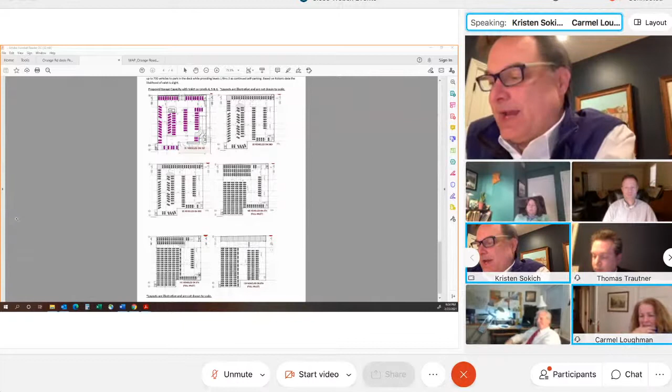The demand for the parking has been nowhere near what the redevelopment plan envisioned. Nowhere near. All you got to do is look at the data. The vast majority of the data, the usage is well below the redevelopment plan. So if you want to look at it from the overall standpoint, this garage is vastly underutilized. We're spending time here talking about how a couple of times it got shut down here and there, but the story of this garage is not those couple of times.

Question for you, but isn't that because the hotel hasn't been open? It hasn't been open. The hotel was open for a good 6 months before Corona hit. I know, but it wasn't open at full. It was just starting, a new venture. It wasn't filled to capacity.

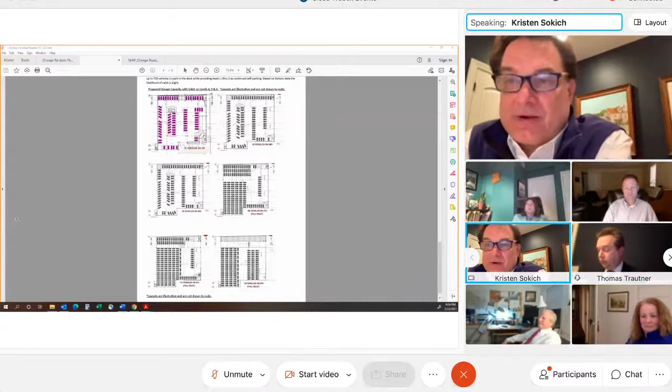What was the 'it' - the hotel? Look, I don't know what their occupancy rates for rooms have been, but what I can tell you is they've never filled the 5th floor. I know, but they haven't scheduled weddings or bar mitzvahs or all that kind of stuff because they're brand new. Okay, I'll give you that - they haven't had a full event season. You're absolutely correct. But let's say they do, we're still going to have plenty of space. There's no doubt in my mind.

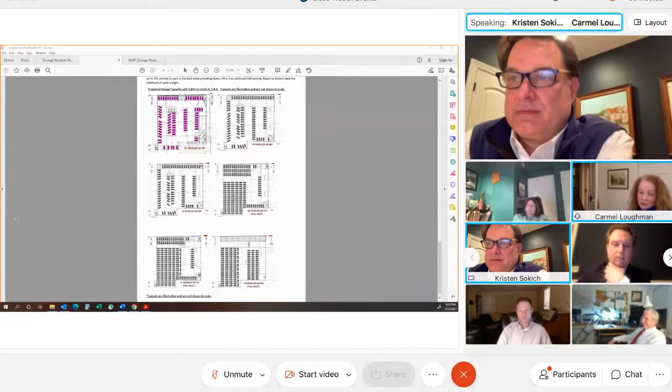So I have another question - are residents given an assigned spot? No. So when you look at your 700 spaces needed scenario, how does it work on the 4th floor when I'm a resident, where am I going to park, how is my parking determined? Do I have to valet park then? No, you're not assigned a spot, you're assigned levels. So if you're a resident, you could park on the 2nd, 3rd, or 4th level.

So let me take you through how it works on the ground. When you come into the garage as a resident, your preference, like most people, is to park in the closest space you could find. When you drive into this garage, you're going to look for a space on 2. If you find a space, you park there. If it's full, you go to 3, and if you find a space, you park there. 4 is your last option.

Our numbers are light for residential parkers. We're doing like 0.9 cars per dwelling unit, which is 10% less than a 1-for-1 ratio. If you go to the 4th floor, you might find maybe 5 or 10 cars there. If we need to flip it to a valet scenario, those cars will be accommodated. If we need to rearrange those cars, we have tools in our toolkit where we could simply roll the car into a spot where it's not going to interfere with the overall traffic for the valet. And that's how we would address it.